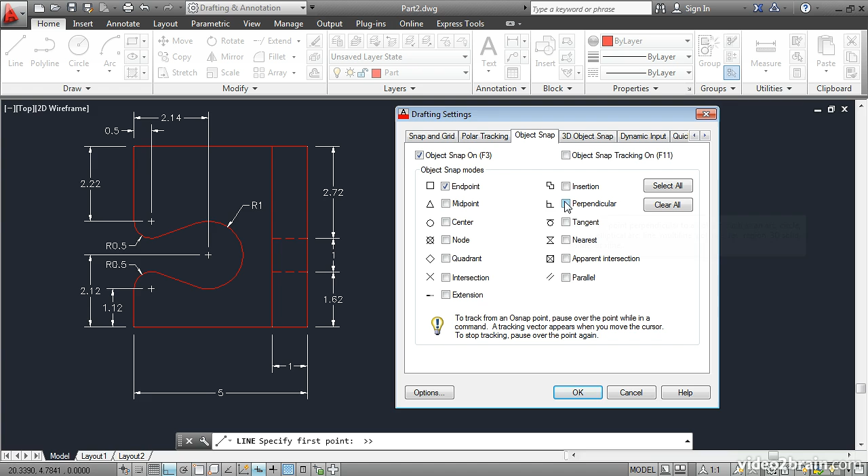I'll select Endpoint and Perpendicular from this menu of Object Snaps. I'll click OK, and then position the cursor over here, and you'll see that the endpoint automatically comes up. I don't have to explicitly call for it every time. This is a great time saver.

I'll click, move the cursor down, and type 1.62, Enter. Move it to the left, type 5 Enter, move it up, and type 1.12 Enter. I'll press Enter again to end the line command.

The next thing I'll do is draw in this vertical line. To do so, I'll type L Enter to issue the line command. Click right here and move the cursor up until I get near the top. You'll see a green marker appear which indicates the perpendicular snap.

Note that you don't have to have the cursor right over that point. As long as the green marker appears, you can rest assured that AutoCAD will snap your line to be exactly perpendicular to the chosen line. So I'll click right here, and the line is drawn.

I'll press the space bar and the space bar again to end and repeat the line command, and then I'll just click from here to draw another line from endpoint to perpendicular. Press the space bar again to end the command.

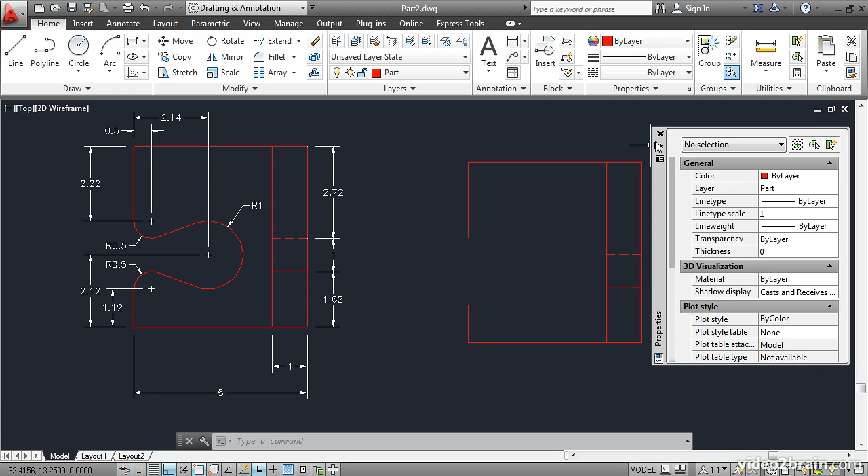Now we have to deal with the circles, and they're a bit more challenging. Let's start by locating the center of this larger circle. It's 2.14 units over. So let's go ahead and draw a temporary line to mark that position.

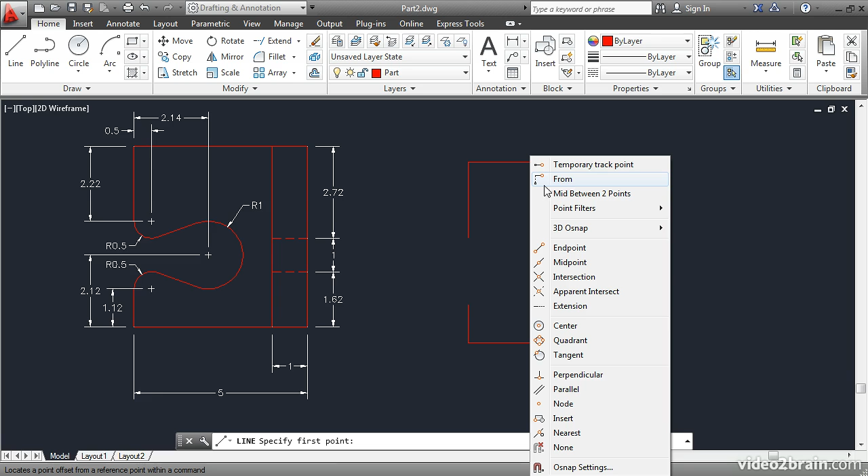I don't want to start here, but 2.14 units over from that point. So I'll hold down Shift, right-click, and choose the From snap. Then I'll click on this endpoint, type at (hold Shift and press 2 for the at symbol), then type 2.14, press Tab, and type 0.

I'm entering relative Cartesian coordinates from that point I just clicked, telling AutoCAD to move 2.14 units in the X direction, and 0 in the Y direction so I don't move up or down. I'll press Enter, and the line begins 2.14 units to the right of the point I clicked. I'll draw this line down some arbitrary distance, click, and press spacebar to end the line command.

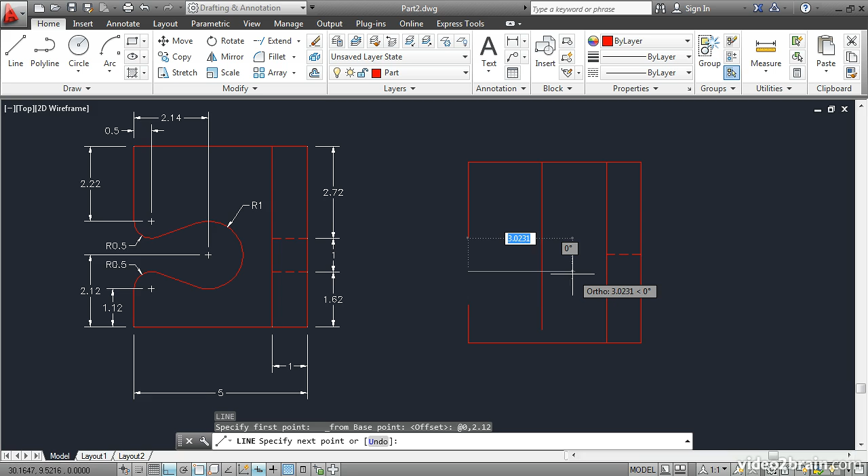I've located where the circle goes in one dimension, but I also need to move it up 2.12 units from the lower edge. So I'll draw another line: type L, Enter, Shift right-click, choose From, click this point, type at 0, Tab, 2.12, Enter. Move the mouse horizontally, click some arbitrary point, then press Enter to end the line command.

Now I've created an object snap point that I could snap to in order to locate the center of the circle. The intersection of these two lines will be the center. Open the circle flyout and choose Center Radius, Shift right-click and choose Intersection, click on the intersection of the two lines, type 1 for the radius, and press Enter.

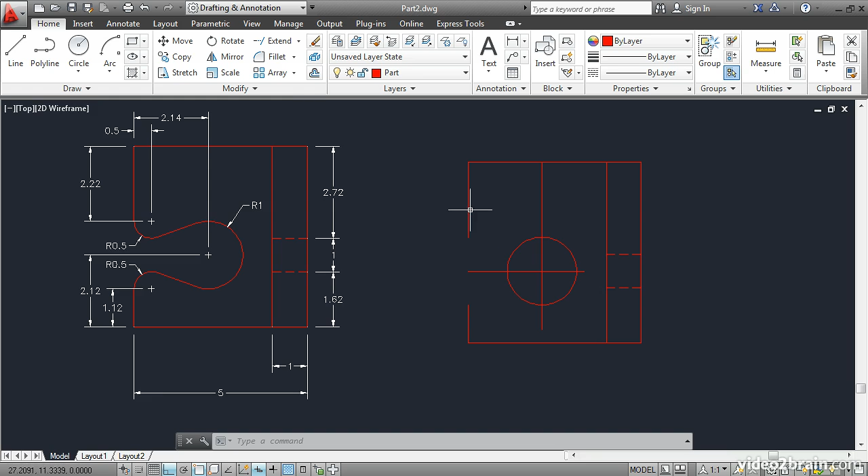Next, let's use the Offset tool to offset lines from existing lines. I want a line half a unit over from this vertical line, so I'll type 0.5 for the offset distance and press Enter. I'll click this line, move the cursor right and click; I'll click this line, move the cursor right and click. I've just generated two lines half a unit from those two existing lines. Press Enter to end the offset command.

Next, we need to draw two circles. Click the Circle tool, put the center of the circle right here, and the radius will be perpendicular to that line. Press the spacebar to repeat the circle command, click twice more, and then draw a line.

This time I'm going to use the tangent snap, anticipating using it several times. So I'll go down here, right-click on the Object Snap toggle, and turn on Tangent by selecting it from the list. That toggles Tangent on so it runs continuously. It's interfering with the perpendicular snap though, so I'll go back, right-click, and turn off Perpendicular. I want Tangent to appear.

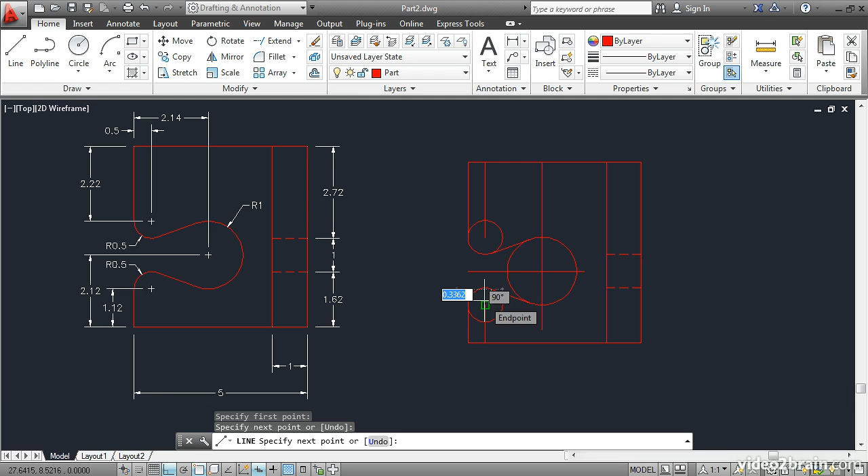That's the tangent icon. I'll click twice, once on each circle, to draw a line tangent to both of them. Press spacebar, spacebar to end and repeat the line command, then click here and here to draw another line. Press the spacebar to end the line command.

Finally, we need to clean things up. Let's use the Trim command, found on this flyout. I'll select all the objects in the drawing as potential cutting edges by pressing Enter, then go around and click the things I want to get rid of. Press Enter to end the Trim command.

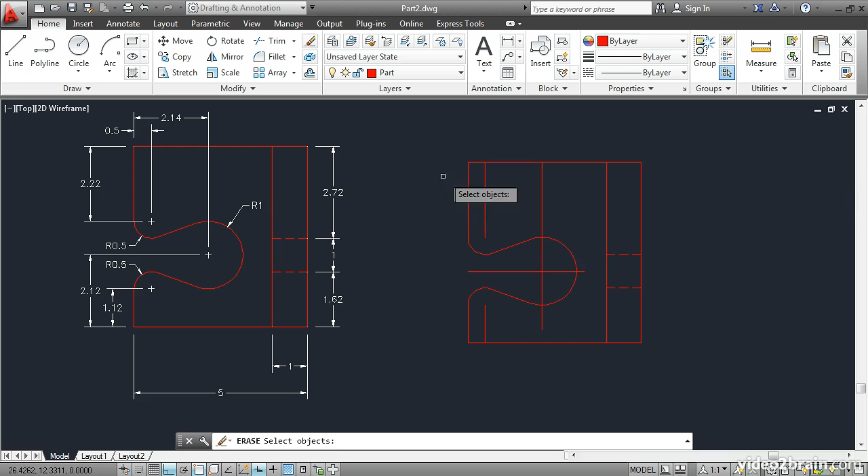Then I need to erase the temporary construction lines that I drew earlier. Press the spacebar to end the Erase command.

So you have learned how to call for object snaps one at a time using the Shift right-click menu and by typing three-letter abbreviations on the keyboard. You have also learned how to use running object snap modes, which leave your chosen object snaps on continuously, saving you time. In addition, you have completed a complex drawing and used a few modification tools in the process.